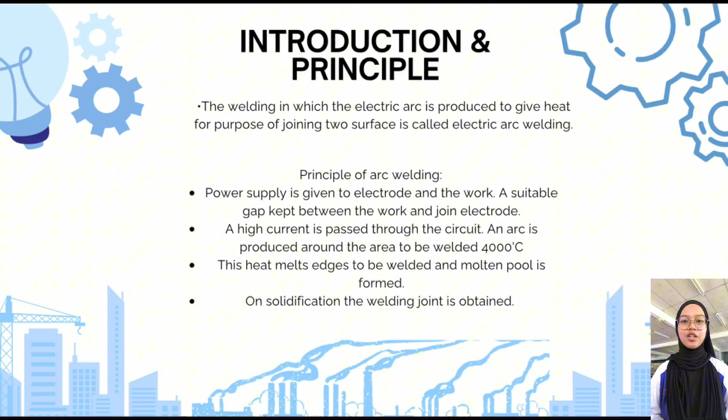09DKM25F1073. Today, our group will present a case study on shielded metal arc welding, also known as SMAW or arc welding. This process uses an electric arc to generate heat strong enough to melt and join two metal surfaces.

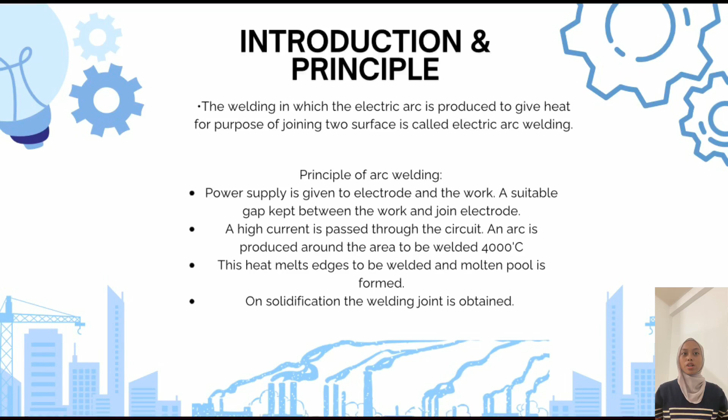09DKM35S1081. There are several types of machine used for arc welding. First is the direct current DC welding machine. It uses a generator or rectifier to produce DC output. DC welding is preferred for thin metals because it provides smooth and stable welding.

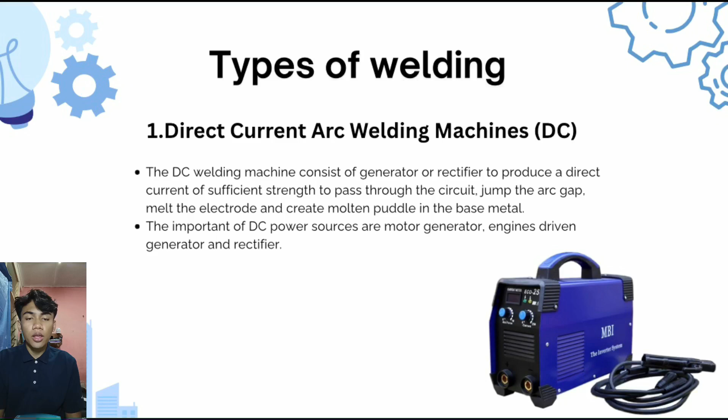09DKM25F1077. Next is the alternating current AC welding machine. This is the most common because AC is widely available in homes and industries. It has no fixed polarity and is cheapest to maintain. Then we have AC or DC combination welding machine, which allows welders to switch between both types depending on the job requirement.

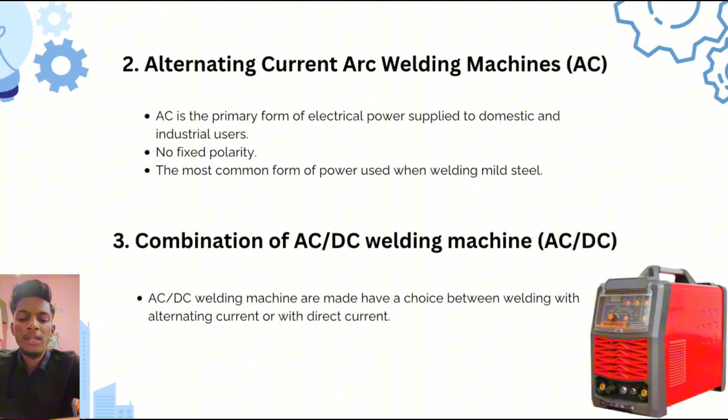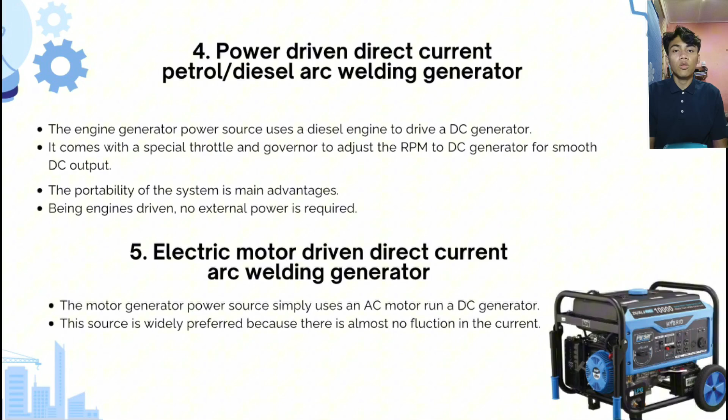Next, there are also engine-driven DC generators powered by petrol or diesel. They are very useful outdoors because they do not need external electricity. Lastly, we have electric motor driven DC generators, which are popular because they provide very stable current with almost no fluctuation. DC welding has several advantages. It works well with both ferrous and non-ferrous electrodes and is ideal for thin sheet metal.

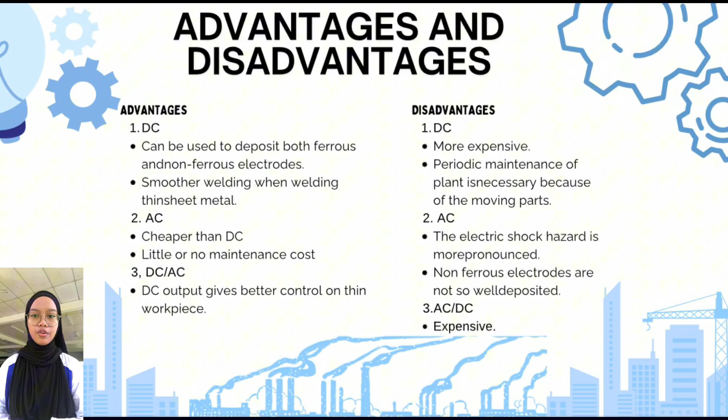AC welding machines are cheaper and require very little maintenance. AC or DC machines give users better control on different types of workpiece. The disadvantages are DC machines cost more and need maintenance. AC machines have higher electric shock risk and are not good for non-ferrous electrodes. AC and DC machines are the most expensive.

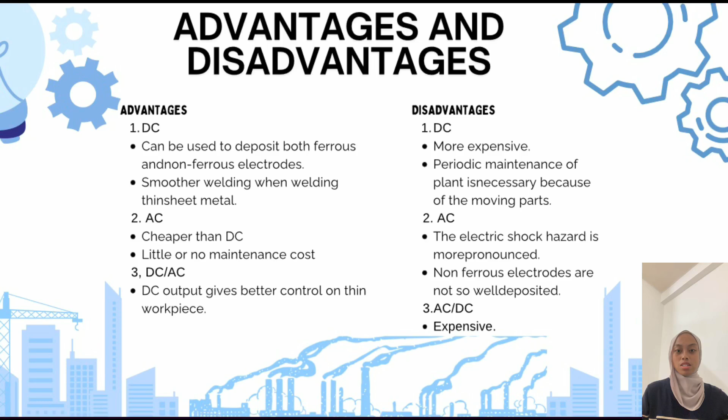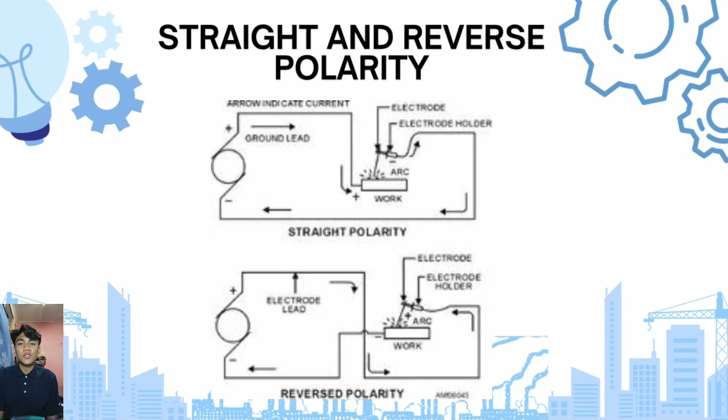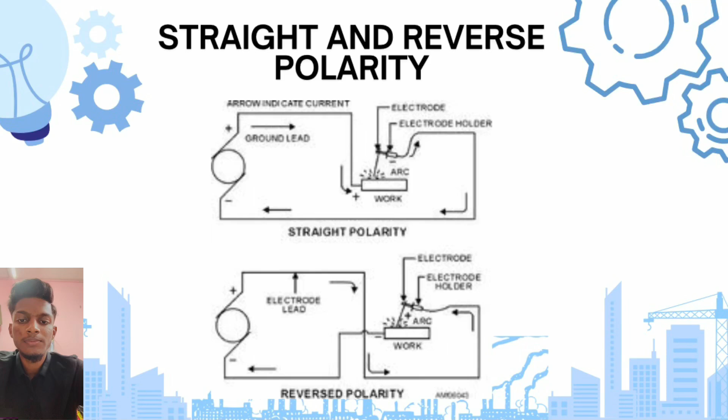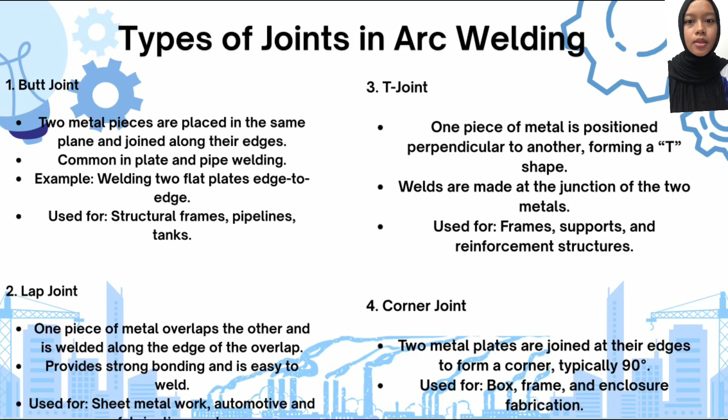There are 5 basic types of welding joints. First, the butt joint, where 2 plates are placed in the same plane and joined at the edge. Second, the lap joint, where one plate overlaps another. Third, the T-joint, where a plate is placed perpendicular to the other to form a T. Fourth type is the corner joint, where 2 plates meet at a corner, usually forming a 90-degree angle. And finally, the edge joint, where the edges of 2 plates are placed side by side and welded, usually used for low stress applications or thin material.

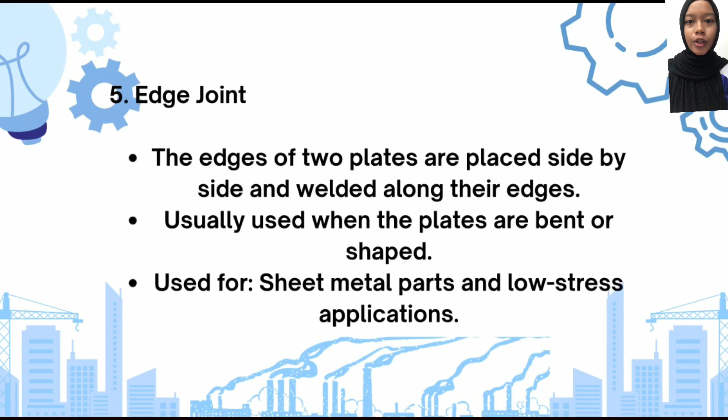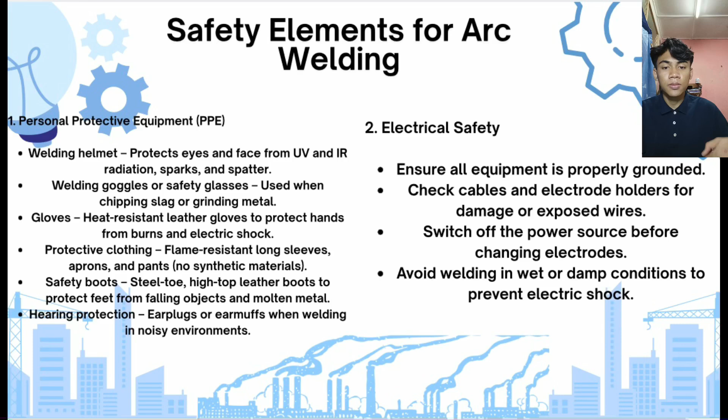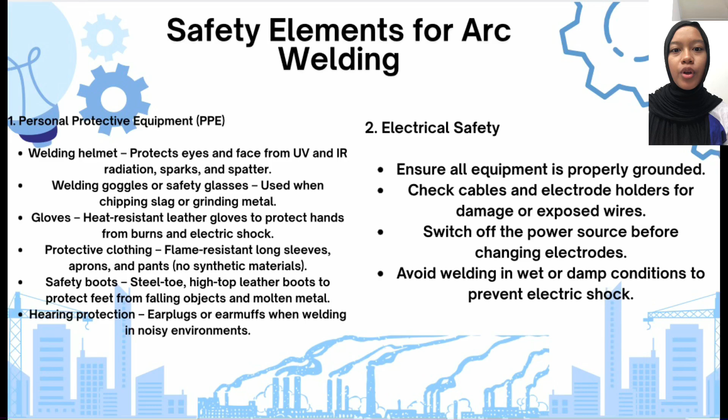Safety elements. Safety is very important in welding. Welders must wear proper PPE such as welding helmets to protect the eyes and face, safety glasses for chipping slag, heat-resistant gloves, flame-resistant clothing, and steel toe boots. Electrical safety should always be checked. Make sure the equipment is grounded. Inspect cables for damage and avoid welding in wet or damp areas. Power should always be switched off before changing electrodes.

Other safety elements include maintaining a clean work area, keeping flammable material away from sparks, ensuring good ventilation to avoid breathing fumes, and using welding screens to protect people nearby from arc flash.